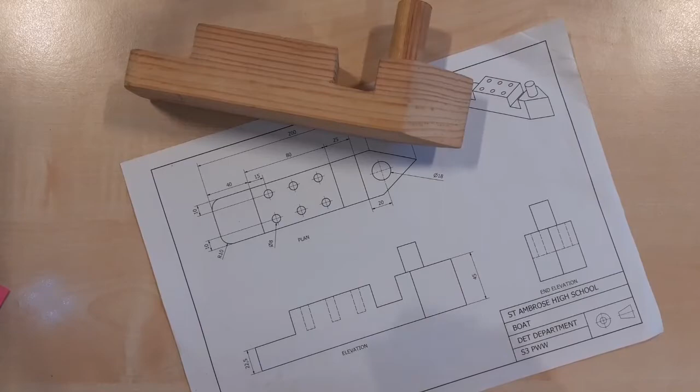Okay, in this video I'm going to show you how to read working drawings. We're going to do that with the help of this little wooden boat and its accompanying drawing underneath it.

So a working drawing is what we call a technical drawing, an engineering set of plans, and they are laid out and they are drawn with rules in mind, with a set of British standards. And the standards are such so that somebody who makes a drawing here can pass that to somebody else working in another side of the world, for example, and the recipient of the drawing would be able to know exactly what it is that they're talking about.

So there are conventions in here, there are rules and guidelines which help us understand what's going on. And I'm going to take you through some of them just now, and from time to time we'll visit the little boat that it's made from.

Okay, first thing we're going to point out is the title box. This is the first clue in how to decode and read a working drawing. There are things quite often contained within this title block that tell you how to decode this. So for example, we've got the name of the school and the name of the object, the part in question, and where it comes from.

Quite often what we'll also find in the title block is the units that we're using. In this case it's millimetres, it's always millimetres in woodwork. And we've got a little symbol down here. This is called the third angle projection symbol. And it's a little icon to denote how these things have been laid out and the rules that have been followed in the construction of the drawing.

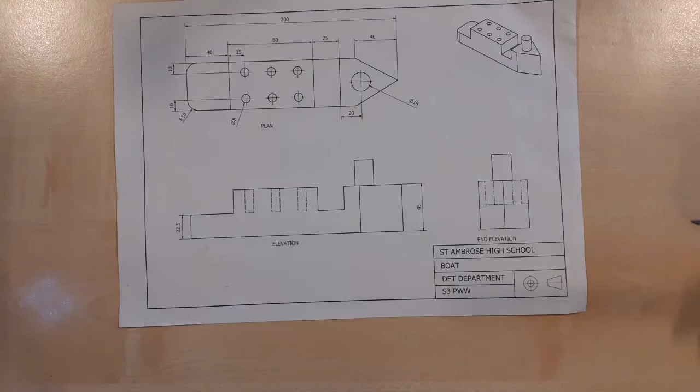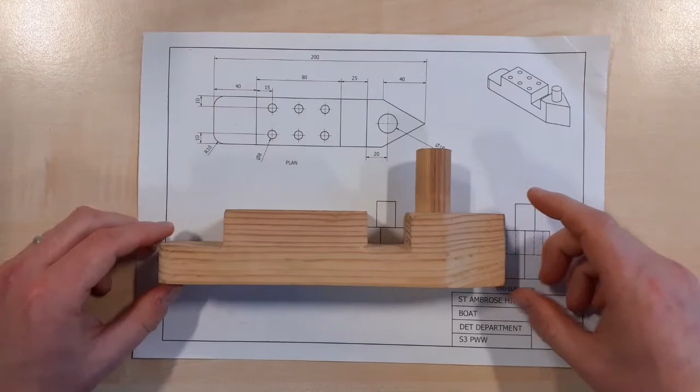The other thing to say about a working drawing, this one in particular, is this is 3 views of exactly the same thing. So it's 3 views of this boat. First of all, up here we've got a top-down view, what we call a plan. We've got a front view or a side view, which we call an elevation. And I'm not sure if this will fit under the camera, but we've also got a view over here of the end elevation.

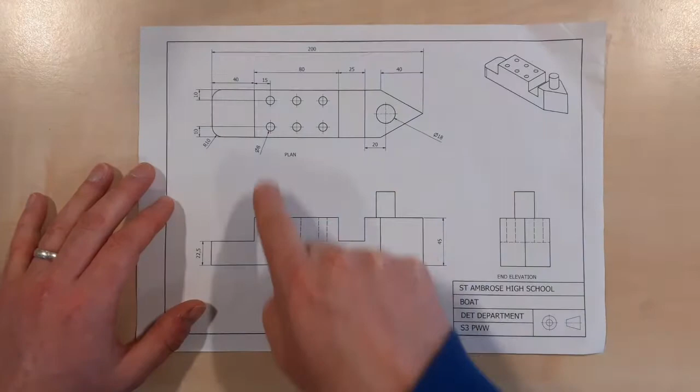And these views all line up. Lines can be drawn down from one view to the next and across to the next, and they're all done to the same scale as well. So, like working your way over a puzzle, you're able to tell which things line up with which features and what sticking-out bits relate to in different drawings.

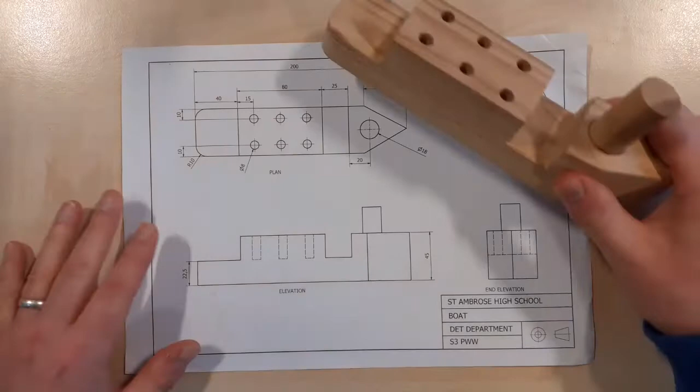So by drawing these 3 things in this fashion, we're able to get a sense of what the 3D object looks like. As it happens, we've also been provided with a little pictorial view here, a little 3D view showing us the boat, at a different scale mind you, but showing us the boat as it would look in 3D.

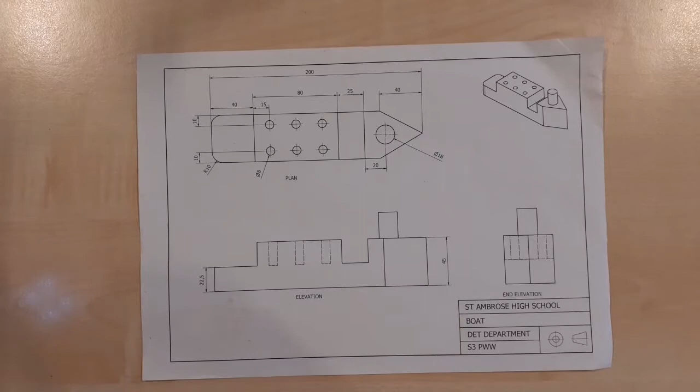Right, sizes. The thing is covered in numbers and arrows, and these are all sizes, what we call dimensions. They're written in millimetres, and there are some funny symbols going around the place as well. Let's write some of these down. So the first symbol that you may notice is that symbol right there, and that is the diameter, that's the size across a circle.

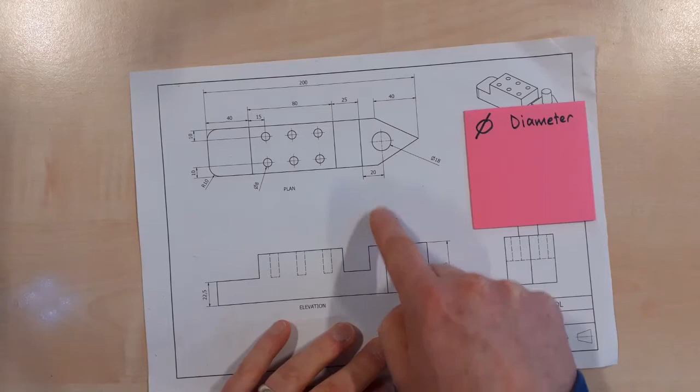You see, sometimes with these working drawings it's not easy to infer what is circular and what is square. If I was looking at just this drawing right here, there's no sense there that that's a circle. We have to look at other views. So in order to resolve that ambiguity, we have a special symbol for when we're talking about the size across a circle. And as you remember, the diameter is the size all the way across the circle. So it says here that this funnel is 18 millimetres all the way across.

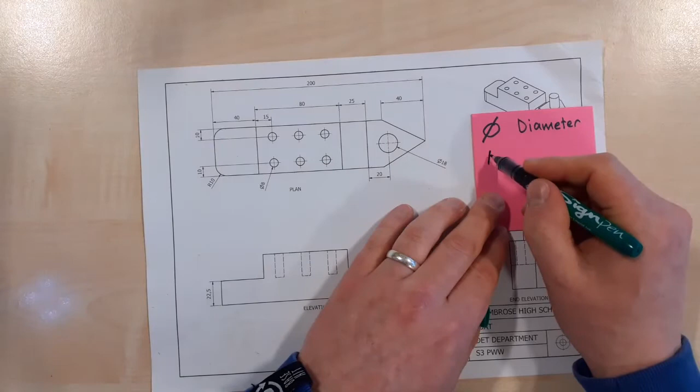The other thing you'll find is sometimes you'll see sizes which are marked with an R, and that means radius. Radius is the distance from the centre of a circle to its outside edge. We use radius whenever we're talking about half circles or arcs or anything that isn't a full circle. So over here, for example, we've got a little quarter arc right here. That's radius 10, that means it's 10 millimetres from the outside of the arc to its centre point.

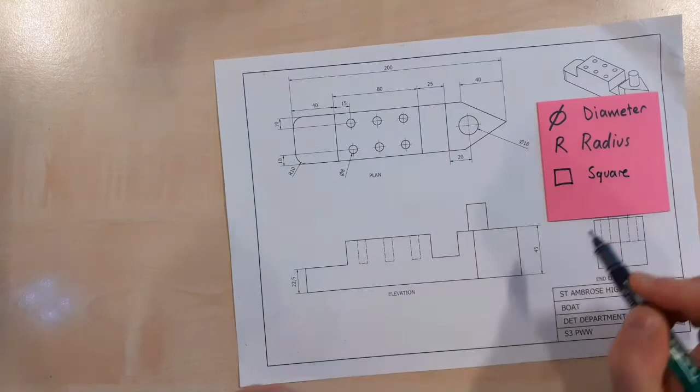You'll also see sometimes in drawings, although not often, the sizes prefixed by a drawing of a little square. And that's just to tell you that a size in millimetres refers to a square, so it would be the same on all 4 sides. We've not got that in this drawing, but from time to time that appears as well.

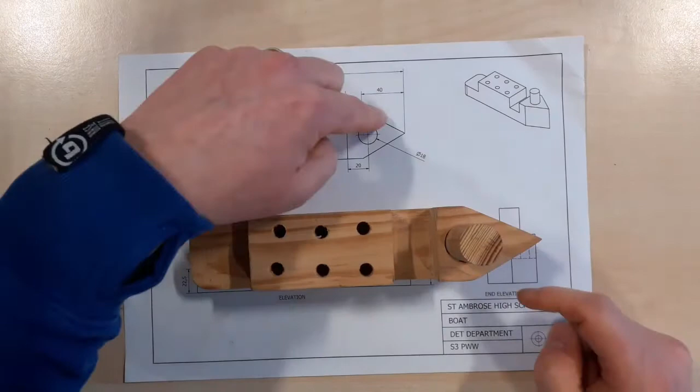Some other things are visible in this drawing as well. We've got solid lines, those are the outlines, those are the visible edges, those are the things about the boat that we can see. So you can see the solid outlines on the plan view here represent all these edges that can be touched and can be seen from the top down.

We've also got, however, dashed lines, and the broken lines denote hidden detail. So for example, these little holes that disappear into the boat, from a side view we can't actually see them, but we know that they're there. They're hidden, so hidden lines we show as broken.

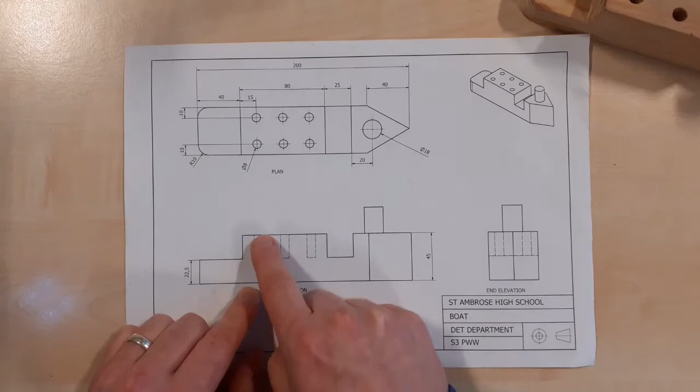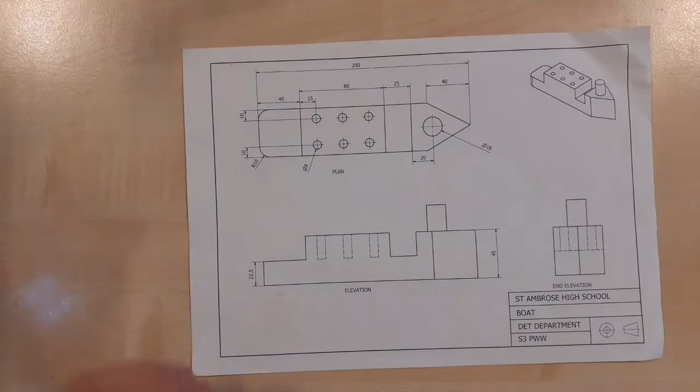So if you like, let's just line that up so you can see. So this pencil can meet one of those holes and disappear away inside it. And it's that little sort of cavity that's represented by these broken lines. So we can see how deep the little cavity goes. And because we project or we draw the same thing from multiple different angles, we can see that those holes line up with those circles on top and line up with these lines right here.

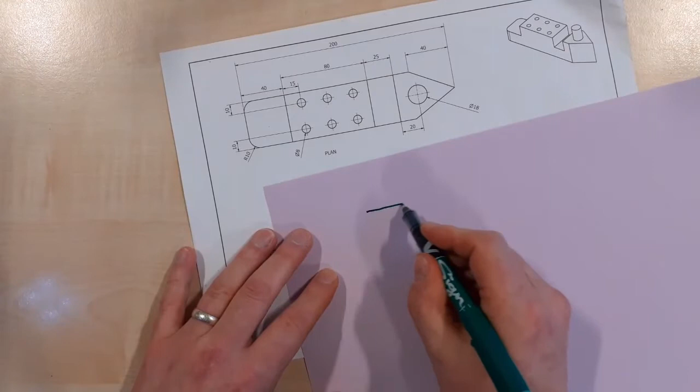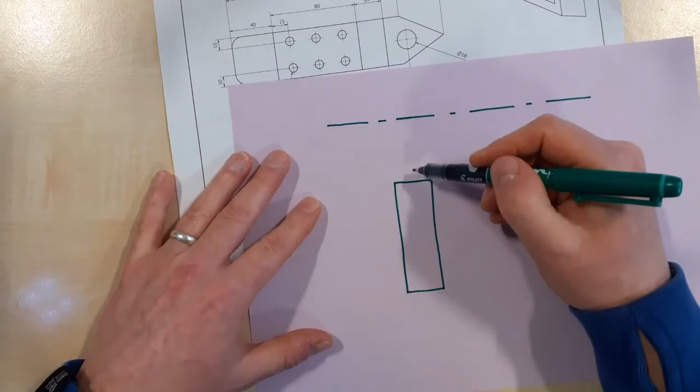We've also got centre lines. Now centre lines appear in here. Let's get a piece of paper. A centre line is long dash, then a gap, short dash, then a gap, long dash, and it goes like this. And we use a centre line to denote things that are rounded. So for example, if I was drawing a pack of Pringles, from the front, a tube of Pringles looks like that. From the front, we don't know if that's a rectangle or a box, so in order to tell the reader that it's curved or cylindrical, we put a centre line down it like this.

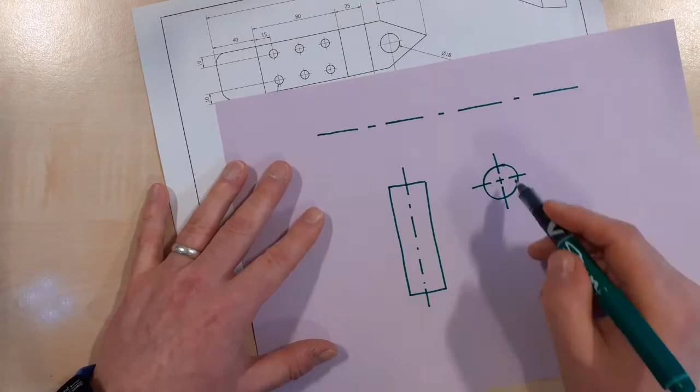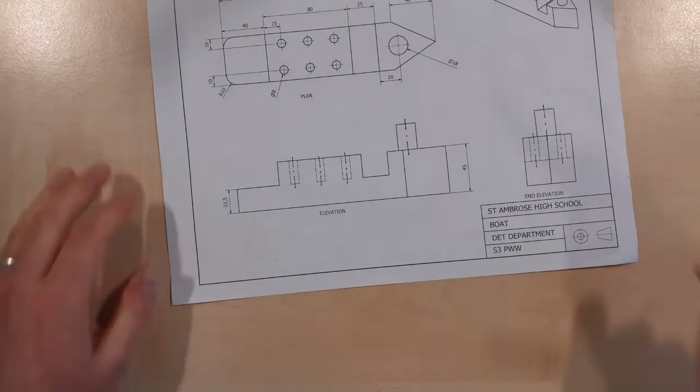Also, if we have to draw circles at any point, they get a special type of thing called a centre mark, which is basically a little crisscross, two crisscrossing centre lines going like this. And again, that tells us where the centre of things are. Although looking at this boat drawing, I can see that in actual fact there should be a centre mark up there and up there. Those are missing, and there should be centre lines going down these bits as well to tell us that those are cylindrical, like that. And that's how you read working drawings.

Let's talk about sizes though. Let's get into the nitty gritty a little bit, okay? So how do you read these sizes that are around the place? Well, the number above a line here tells us the distance between these two lines. So for example, if we follow the arrow and follow the extension lines downwards, then the distance between these two lines, in other words, the size of this trench in here, is 25 millimetres.

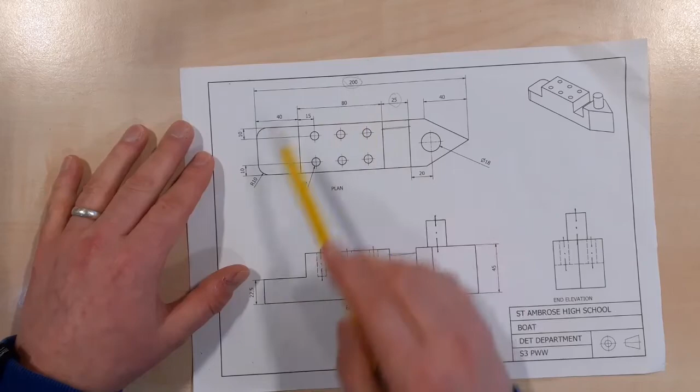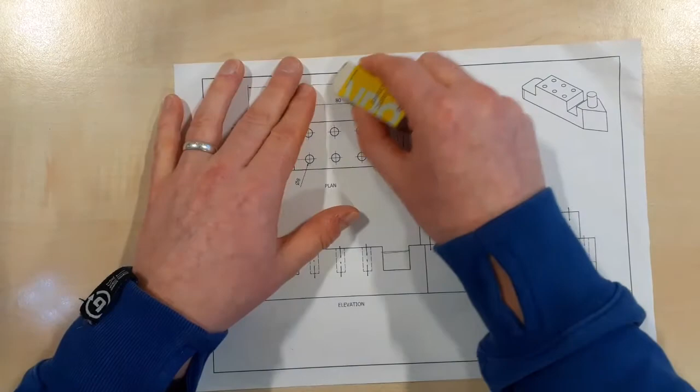It tells us the overall length of the boat. Let's follow the extension lines up, and we can see that this dimension line is the one that we're looking at, and the overall length of the boat is 200 millimetres, and so on. Let me rub those marks out, because I'm going to leave this on screen for a minute, and I'm going to ask you some questions about this.

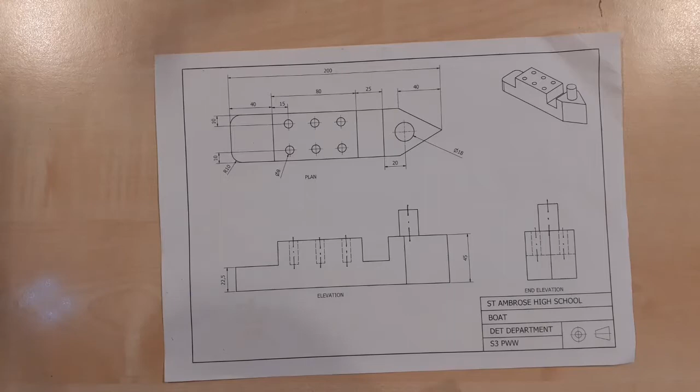So if I showed you this drawing and asked you things like, what size are the little holes that you can put your pencils in? This is a pencil holder. These little holes you can put your pencil in. What size are those holes? What is the overall height of the boat from the bottom to the top surface here? And how wide is the kind of helicopter deck at the back? So those were 3 questions.

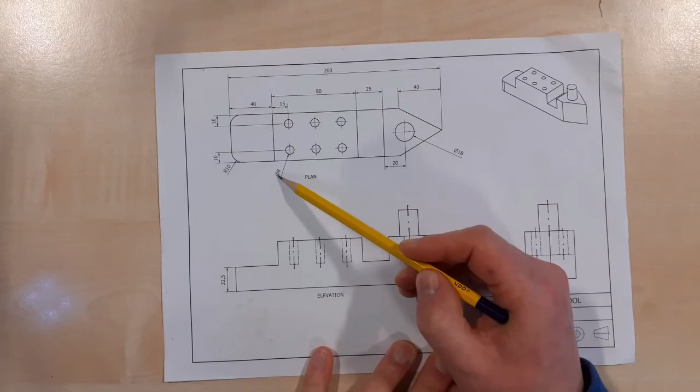First one I asked you was the size of the holes. How big are these holes? We can see that they are diameter 8 millimetres all the way across. But that's not enough. We then asked how deep do they go, and we can see that they go all the way down to the bottom here, which completely lines up with this size right here, 22.5 millimetres. The overall height from bottom to top is right there, 45 millimetres as well.

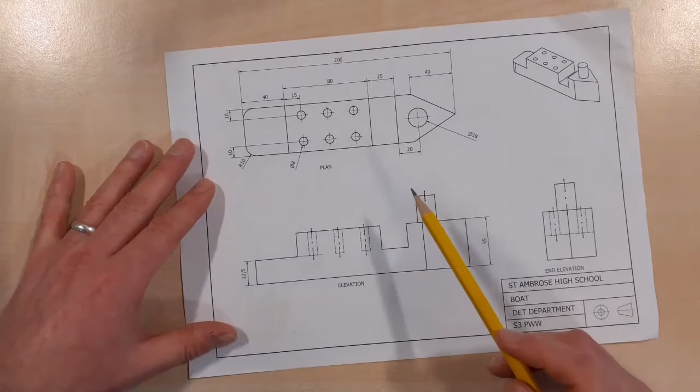And I asked you the depth of the little helicopter deck at the back. So how long is the helicopter deck from here to here? How long is that size? Well, it's not written on this drawing. Let's put our fingers out and follow them up, and we realise that the size lives up here.

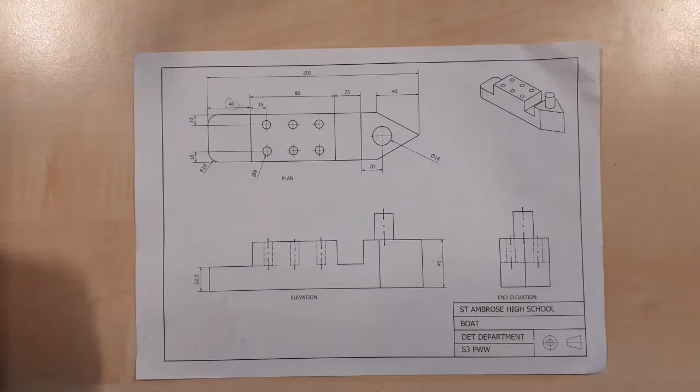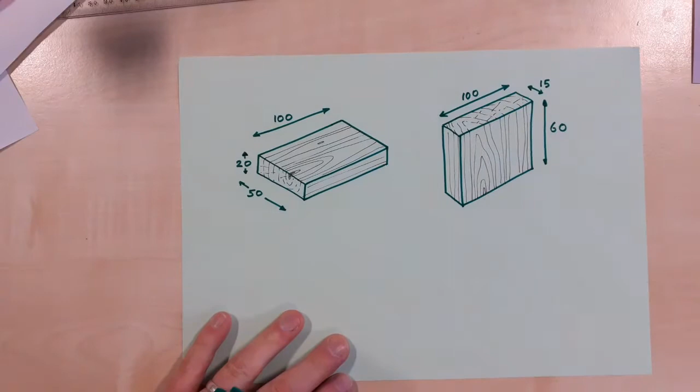Now there's a special consideration when it comes to drawings of wood and wooden things. In front of you here I've got 2 wooden blocks, and each has been presented with 3 different dimensions, 3 different sizes on it. We're told that from here to here it's 100, that it's 20 from top to bottom, and it's 50 from front to back here. On this one we're told that it's 100 this way, this time it's only 15 across there, and we've got a size of 60 running up and down this side.

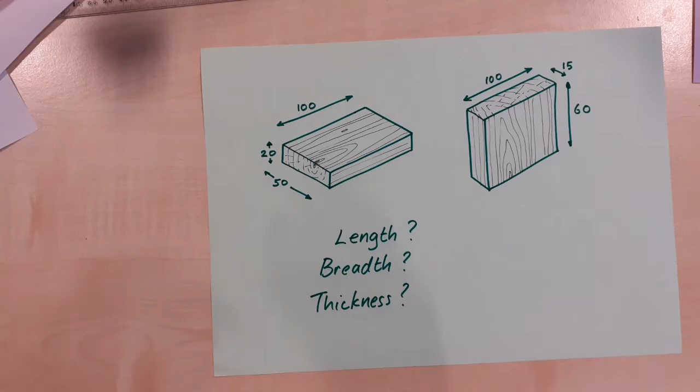So the question I'm going to ask you then is, of all these numbers, which of the numbers is the length of the wood? Which of the numbers is the breadth? And which is the thickness? For certain materials, say this was a lump of plasticine, or a piece of stone, or a piece of MDF, you can decide which number is length, breadth and thickness. But when it comes to a piece of wood, there's a little convention that we have to follow, that the length is always along the grain.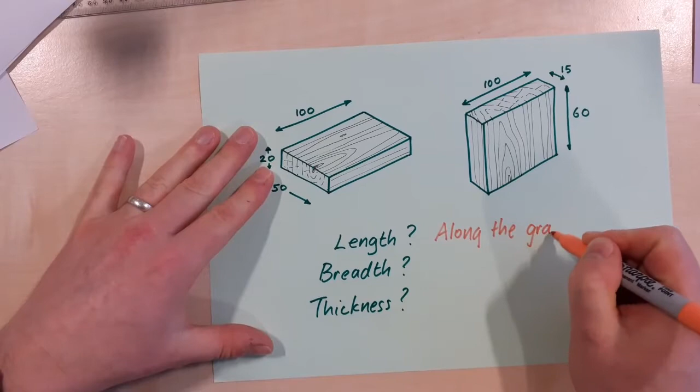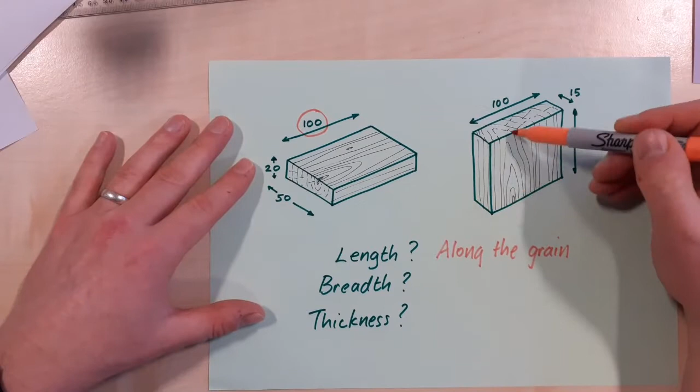Always along the grain. So in block number 1 here, we can see that the grain is running this way. So in other words, that block has a length of 100. In this block right here, we can see that the grain is running top to bottom. So the size that's going along the grain, the length of it is 60. It's not always the biggest number. It's not always the number that's on the flat. It could be going the other way, but it's always the number that points along the direction of the grain.

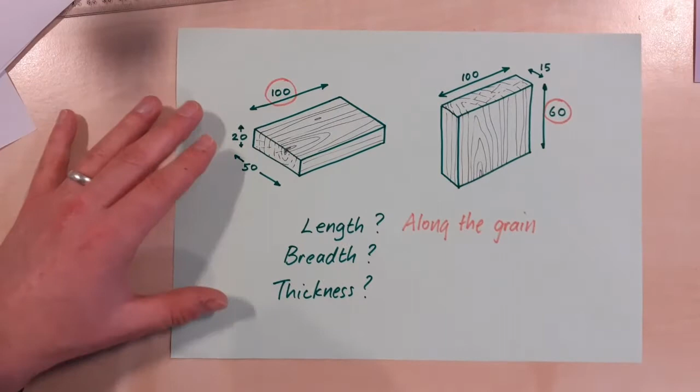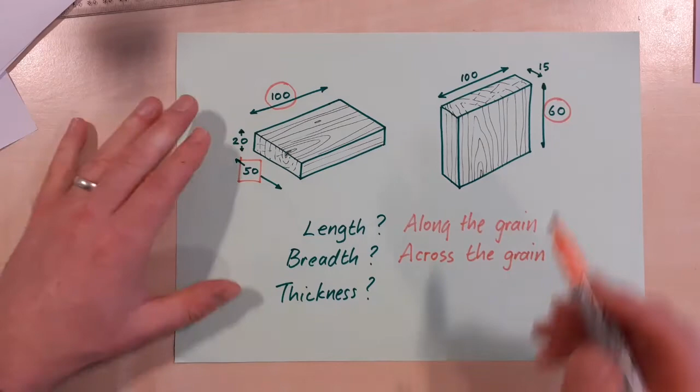The breadth also has a little convention attached to it as well. The breadth is the number going across the grain. So once you've established the direction of the grain, ask yourself which number cuts across it like a saw. And in this case, it's the 50. So this piece of wood has a breadth of 50. Up here, there's the grain going along it. Which number's cutting across it? It's this one right here. So this piece of wood has a breadth of 100.

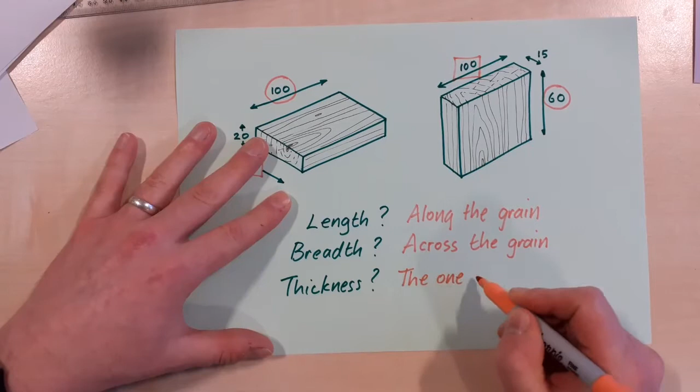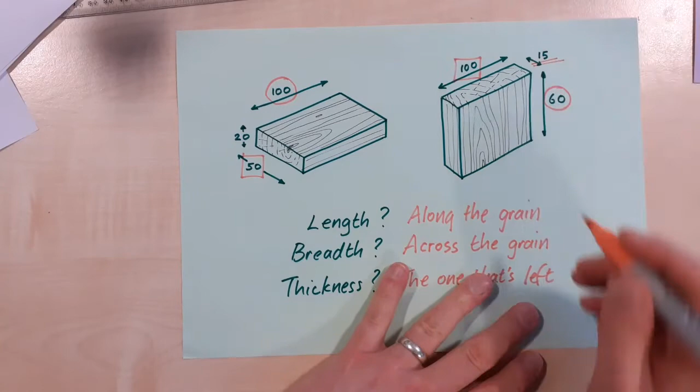So then, which is thickness? Well, the one that's left. So the one that's neither length nor breadth must, in that case then, be thickness. So this is 15 thick up here, and this is 20 thick over there.

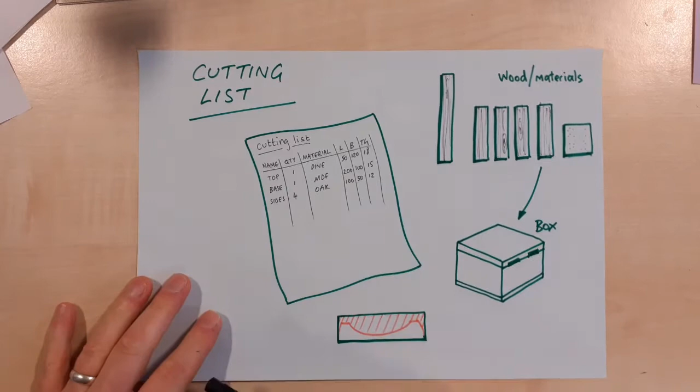So now we're going to talk about cutting lists, and before we get started, it's worth talking about what a cutting list actually is. Well, it's a document that you're going to have to write, which resembles a shopping list. It's a shopping list for wood and materials, and in the cutting list you're going to outline all the parts, all the bits of material that you're going to need cut so that you can make the thing that you're going to make. So a cutting list describes all the raw materials, the sizes of the raw materials that you need in order to make a thing. It's really as simple as that.

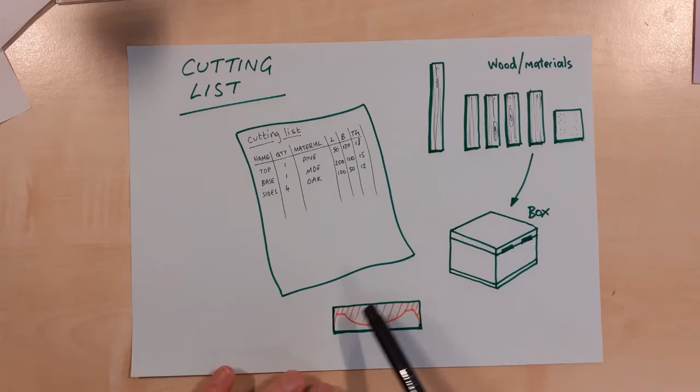There's just a couple of funny things to a cutting list. It has to be laid out in a certain kind of fashion, and we'll talk about that in a minute. You have to be quite specific with your sizes. And also things tend to get a little tricky if you've got a shape which ultimately is going to be curved or something like that. Into your cutting list, you have to put the size of the plank or the piece of material from which you're going to cut your more intricate shape. So we're always dealing with rectangles and squares when it comes to cutting lists. Let's get into it.

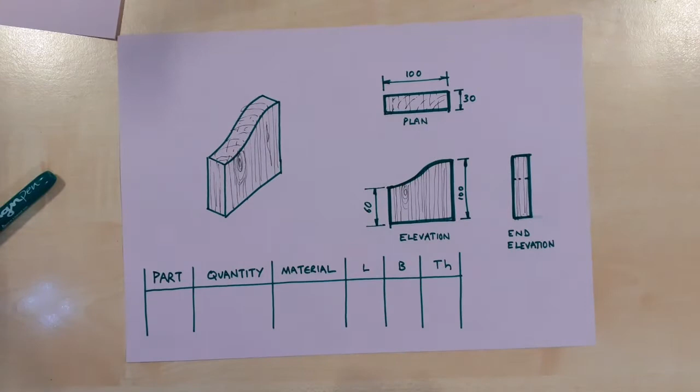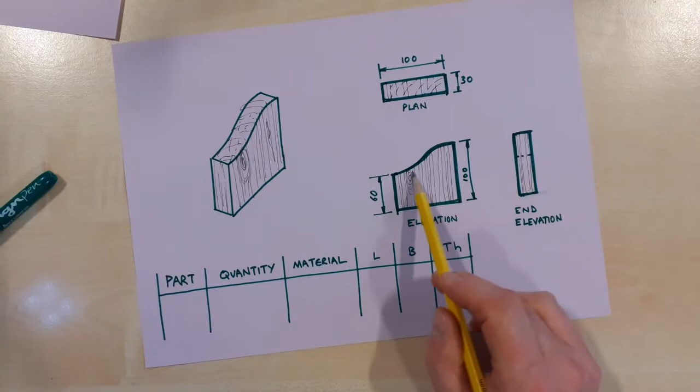Let's talk about some basics to do with cutting lists. I've got a working drawing of a wooden thing here, and I've indicated on it the direction of the grain, and I've given some dimensions. I've also referred to the drawings properly. I've got an elevation, a front view, a plan, which is a top view, and an end elevation, which is a side view. So this is what this shape looks like from the front, the top and the side. You can see here I've also got a little piece of hidden detail, and that little dashed line represents a hidden edge over here that we can't see. We have to still draw it.

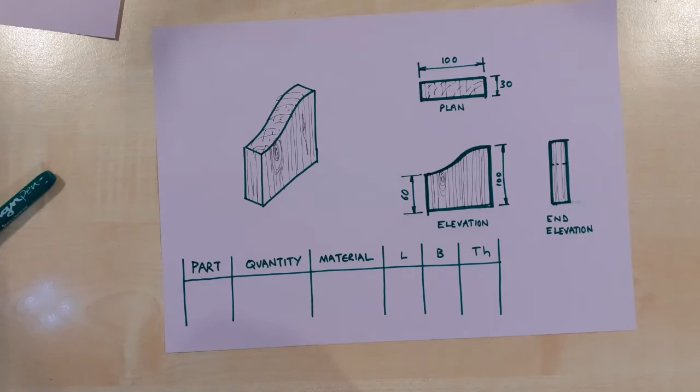So the question will be asked, if you wanted to make that piece of wood, how would you fill out a cutting list? A cutting list, after all, is a list of square or rectangular pieces of wood from which you can make your components, and this is one component. So a cutting list is almost like your shopping list. How could I go ahead and make that component? What size of material would I need? Well, with a cutting list you tend to follow these columns right here. First of all, you give your part a name. Doesn't really matter what. What will we call this? We'll call this the side piece. So this is the side piece.

How many of them? Quantity do we want? Only want one of these. What material shall we make it out of? Well, I'd quite like it made out of pine. Thank you very much. And then we go to talk about the length, the breadth and the thickness and stuff.

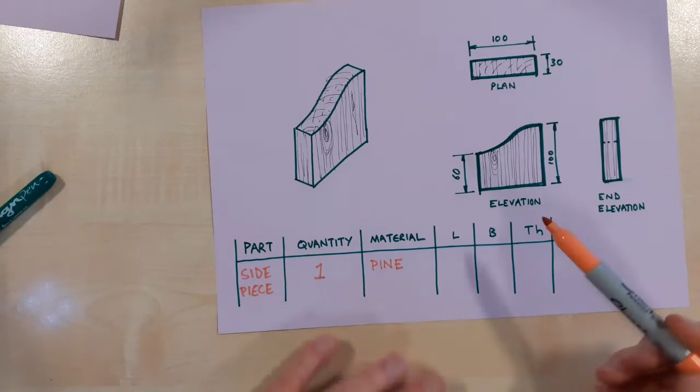We've got a bunch of sizes here. We can see that this tall end is 100, the short end is 60. We can see that it's 30 across here, front to back, and it's also 100 wide. We know that length runs in the direction of the grain. Okay, so that means that either this or this, these are both lengths because they run in the direction of the grain. The arrows go in the same direction.

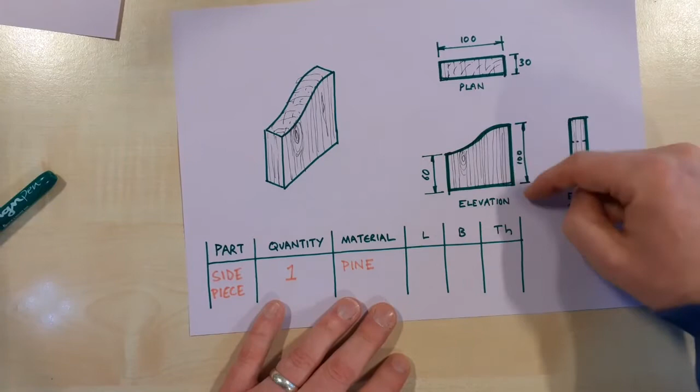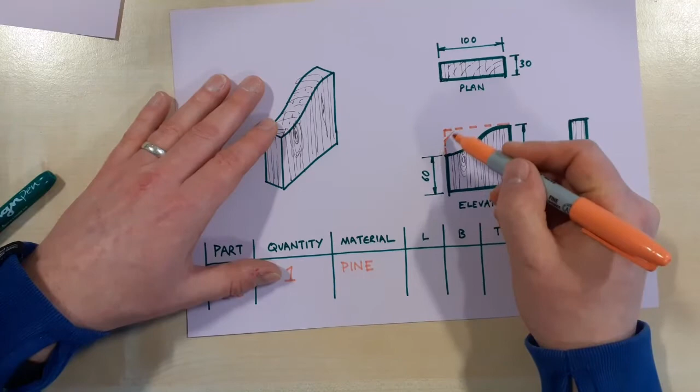But what do we put down inside our length box? Inside our length box, we have to write down the size of the plank of wood that we'll need to make this shape. And as you know, what we'd have to ask for is a piece of wood about that size, and from that then cut away this bit here. So into our length, we would write 100.

Like this. Then we need to ask ourselves, okay, well if that's us got the top to bottom size figured out, that's length, which is breadth and which is thickness. It looks to me that breadth is across the grain, like this. So breadth is across the grain, which means breadth is also 100. And thickness, what thickness of wood do we need? Is that size in right there. It's 30.

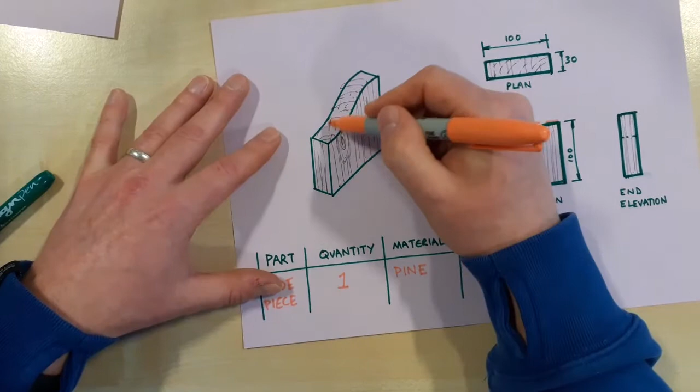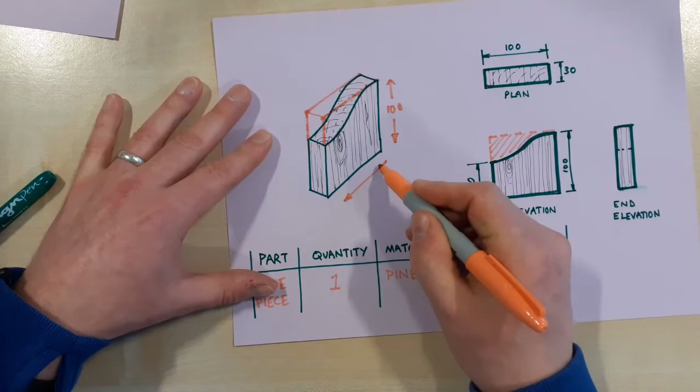And what that would effectively give us is a plank of wood. Well, let's just draw this in with solid lines. A plank of wood that would be as big as that. 100 in length, 100 in breadth and 30 thick. We would then have to remove this portion up here.

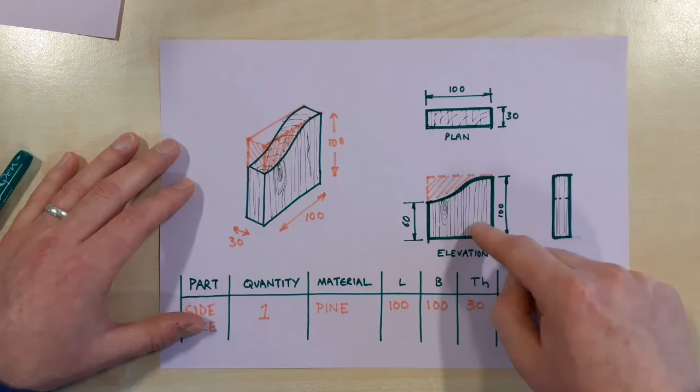So it's important you realise that when you come to do cutting lists, you're asking for a piece of wood, a plank of wood that is as big as possible. The largest possible part you need to get the whole thing out of, including the waste wood as well.

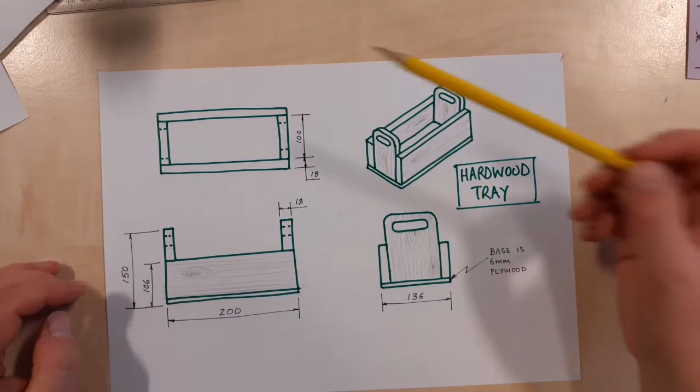Right, so let's see if we can figure out what this working drawing is all about and if we can write a cutting list for it. Let's put the cutting list to one side for 1 second because our main job initially is just to figure out what it is that we're looking at here. What have we got? Now, a working drawing isn't something that you can glance at and in one moment understand what's going on. It's like a piece of music. You have to just sort of puzzle your way over it and try and figure out what it's telling us.

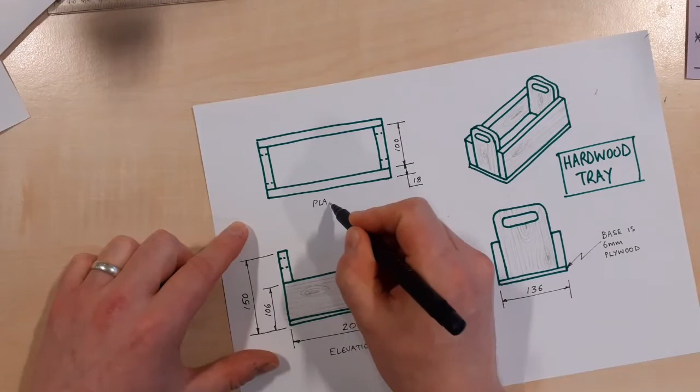So, we've got an elevation. Let's write this in so we know what we're talking about here. We've got an elevation, and that's a kind of front view. We've got a plan view, and we've got an end elevation, side view, of this hardwood tray. Sizes are in millimetres, and we've also got a little pictorial sketch as well. Hopefully the camera is also picking it up. But we've also got an indication of what direction the grain's going in any of these parts. That's going to help us determine what length is.

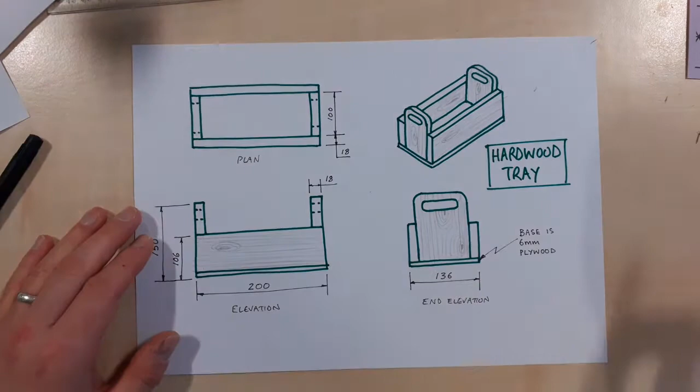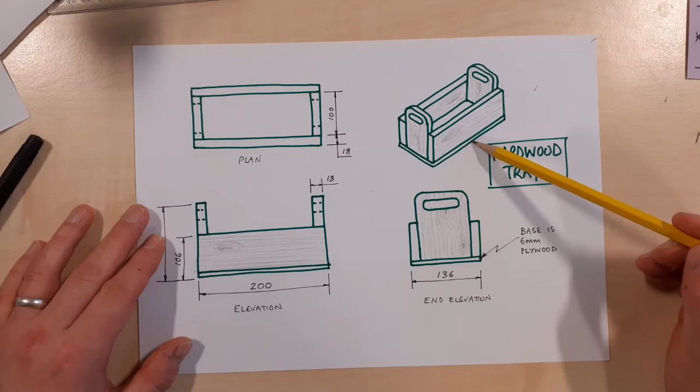So let's see what we've got. This is probably the easiest drawing to understand. The first job is to figure out all the bits and pieces that we've got in front of us. And on the face of it, it looks like this box is made of five pieces. 2 handle pieces, a back and a front, and a base. But then you think to yourself, now wait a minute. Are the front and the back the same?

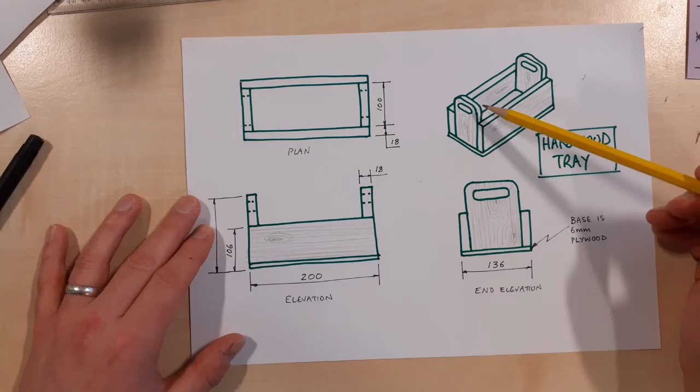And we can look at these drawings here and we can determine that the front and the back are indeed the same. Exact same length here, exact same height, exact same width in both cases. So the front and the back are the same, and it looks also like the 2 handles are the same. So in effect we've only got 3 different parts here. We've got the front and back, we've got the 2 sides, and we've got the base. So that's our first job inside the cutting list, is to write that down. So we've got the front and back.

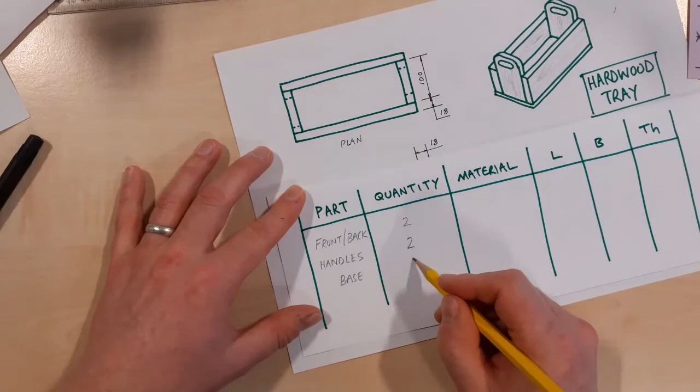The front and the back, we've got the handles, and we've got the base. How many of these do we need? Well, we need 2 of those, the front and the back. We need the 2 handles, the left and the right, but we only need 1 base. And that adds up to our 5 components. 1, 2, 3, 4, 5.

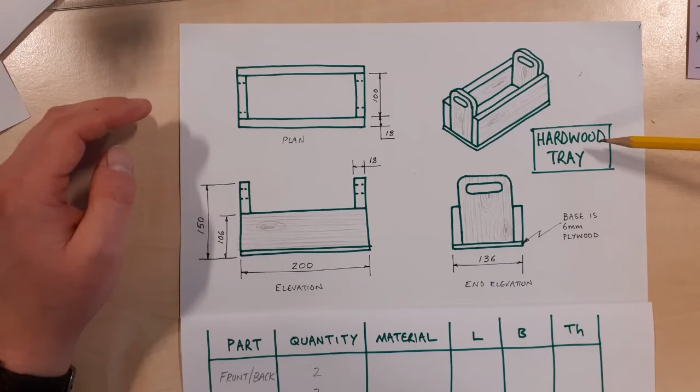Right. The next simple bit then is material. Let's look over the drawing and see if we've got any clues about what material this tray should be made from. We've only got 2 clues. The title is that it's a hardwood tray. That's the first clue. And the second clue is that it tells us here that the base is made of plywood. So let's pop that in immediately. So the base is made of plywood, manufactured board.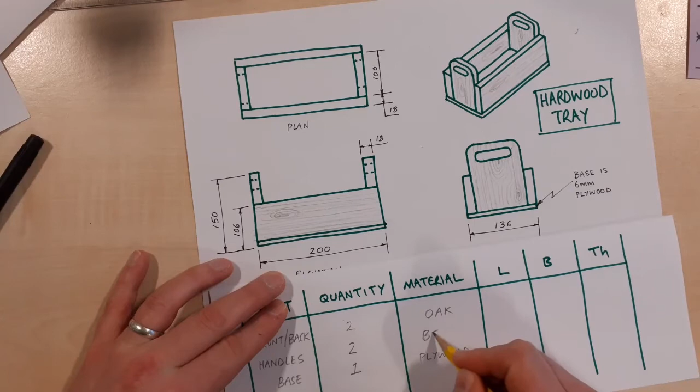And the rest of it, it just says it's hardwood. So let's be specific. Let's say that the front and back are made of oak, and the handles are made of beech. You can write any suitable hardwood in there. That's what I'm going with.

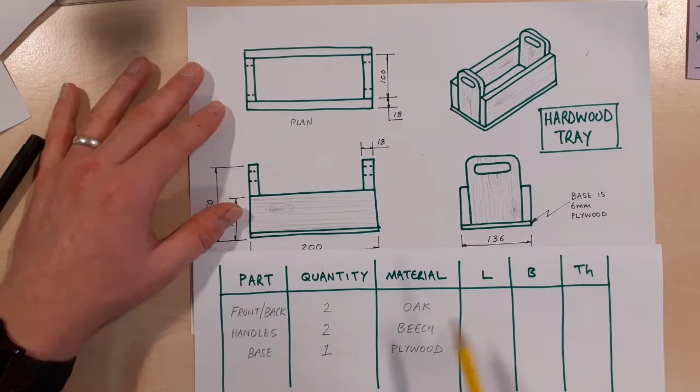Right, now on to the sizes of things. So we need to now scan the drawing to see if we can find the length, the breadth and the thickness of these parts that we need. So let's look for the front and back first of all. So this part here, it's the long thin parts in the 3D drawing. That's the front there, and that one's the back in there. So we have to figure out how long, how wide and how thick this is. So let's look over the drawing and see how long it is.

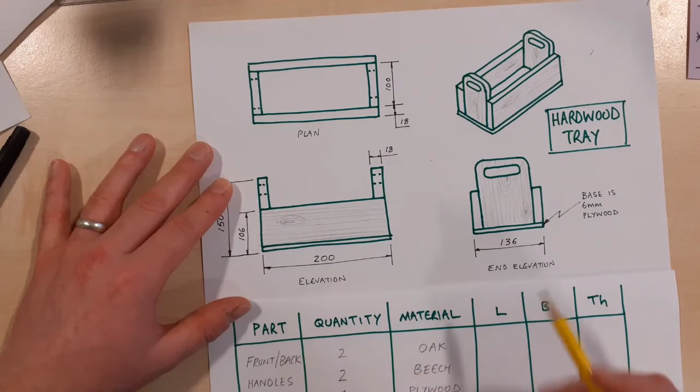Remember, length runs in the direction of the grain, and we can see here that the length of it is 200. Breadth runs across the grain. So breadth goes in this direction. I know as we're looking at this piece of paper right now, you might call that height or something like that, but you've got to keep in mind the fact that we're looking at the grain. Length goes along the grain and breadth goes across the grain. So let's see if we can get a size here.

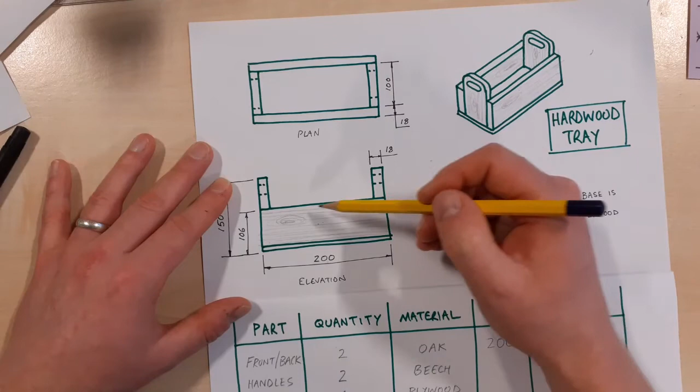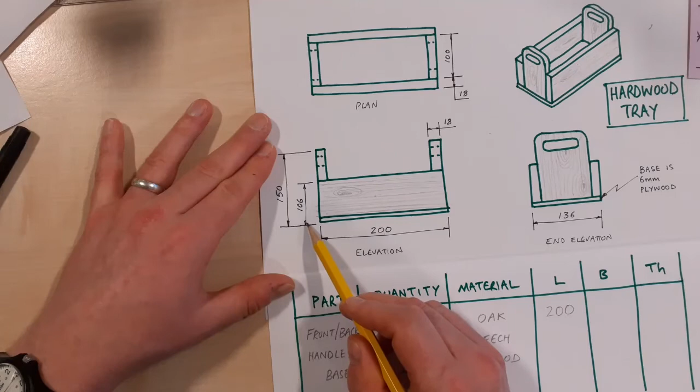Well, we can. It tells us here that between there and there is 106. But wait a minute, because that size also incorporates a little bit of base as well. So it takes us 106 to go across that, and it also includes the base. So we're going to have to do a subtraction here. We're going to have to do 106, take away the thickness of the base. 6mm plywood is what the base is made of. So it's 106, take away 6, leaves us with 100.

And the thickness, how thick is the front piece? Well, we can't see thickness in this side. We can see thickness here, that's the thickness of the part right there, but there's no dimension, we're only told an overall dimension here. Let's follow that up, aha, there it's there. So it's 18mm oak. That'll be expensive stuff. Thickness 18. Alright, let's look at the handles now.

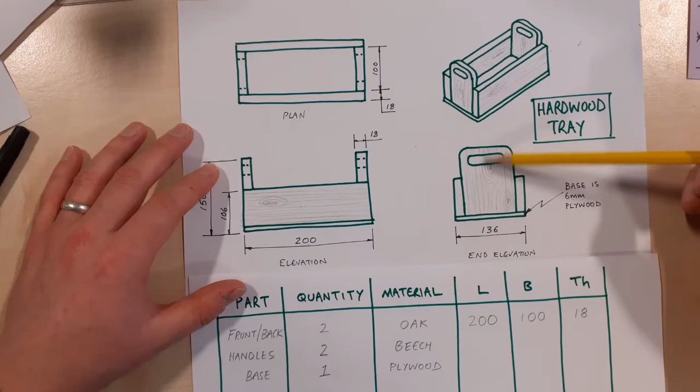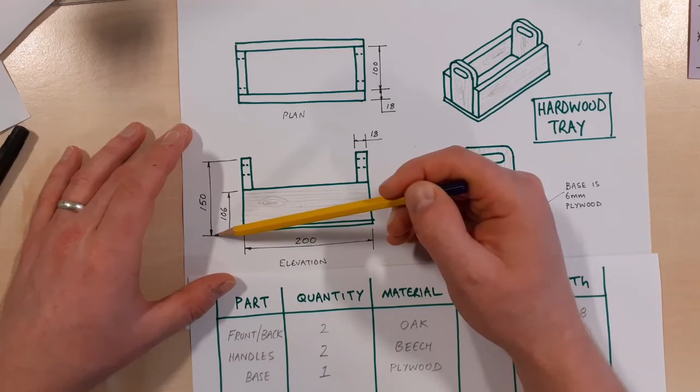So the handles, the length runs in the direction of the grain, and the grain in this drawing is going up and down. Does this tell us how long the handles are? It does not. But it does tell us over here. So it tells us that it's 150 from the very bottom of the box to the very top of the handles. So again, we're going to have to do a subtraction because that takes into account the thickness of the base. So it's 150, take away 6, 144 for the length of the handles.

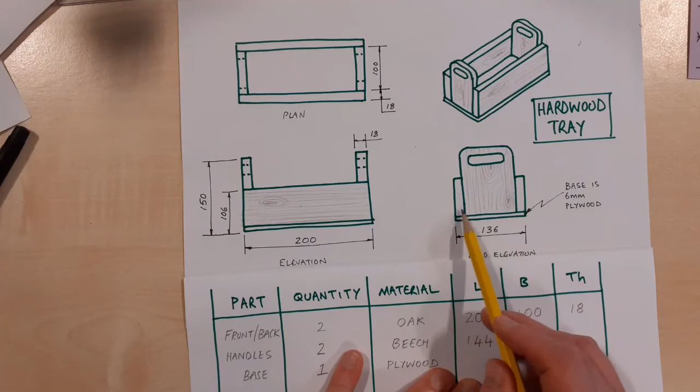The breadth runs across the grain. Now, we've got an overall size here, and we know that the outside parts are 18. So we could do a calculation here, but it's actually written for us up here. So there's the breadth. In the top view, it shows us the breadth of the handles is 100. And the thickness, let's see, tells us right there where the thickness is. That's the thickness of the handle right there, 18.

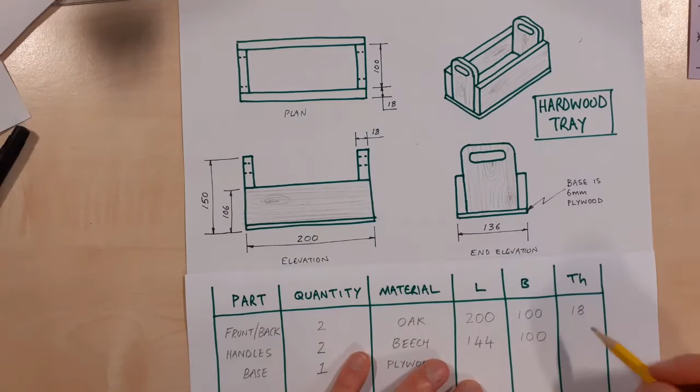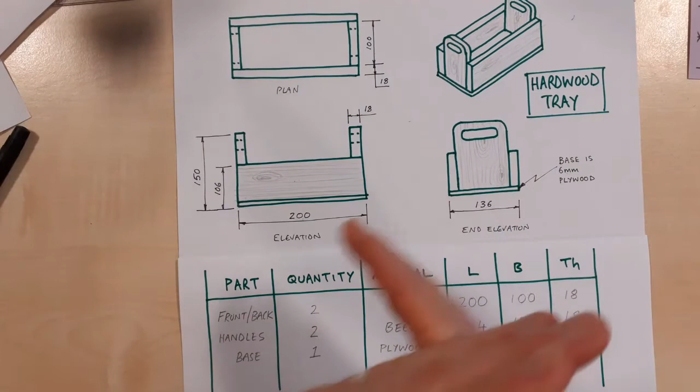And finally, plywood, the base. Plywood, being a manufactured board, doesn't have a grain to it. In fact, it's made of layers where the grains alternate in different layers. The grains go at orthogonal angles, 90 degrees with every layer. So it doesn't really matter what we pick as the length or the breadth. So why don't we just pick this one here? So there's the base.

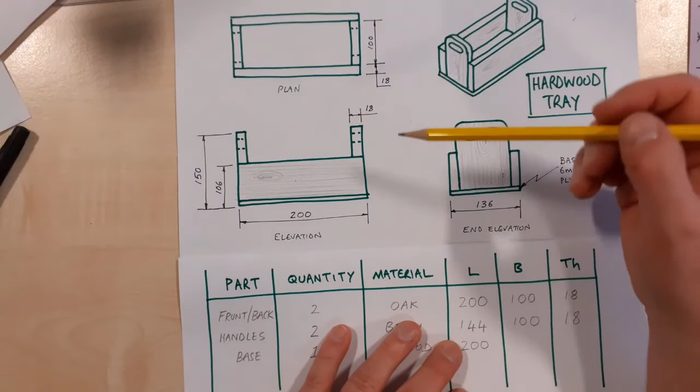The base runs the whole way across the box. So let's say that it's 200 millimeters long, and that its breadth would run from front to back that way. That's the breadth there. That's the length. It's 200 long, and the breadth is this size right here, 136. And where do we get the thickness from? The thickness comes from this note right here, so we know that it's 6 millimeters. And that's our cutting list completed.